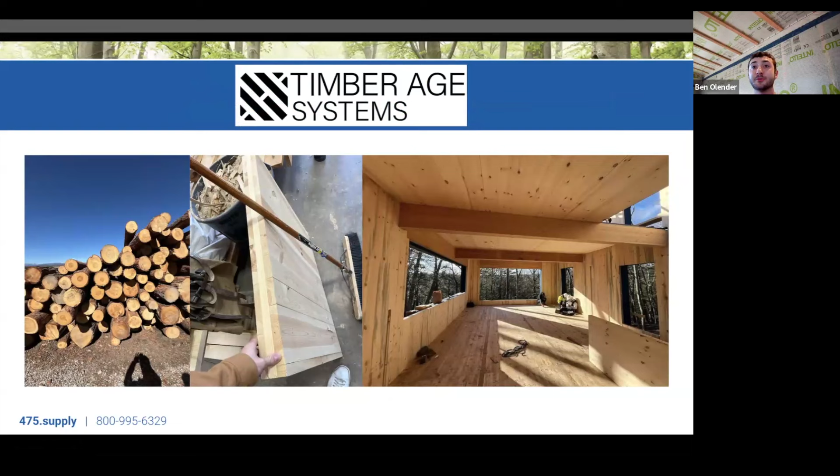Hi everyone, I'm Ben Olender. I cover the Midwest and Rockies, as Johnny said, 17 states, so a pretty wide range in projects across my region. The ones I'm going to highlight today will be Timber Age Systems, a CLT company based out of Durango, Colorado. They have these great products, building out a system based on an interior core of ponderosa pine, using reclaimed wood from the Forest Service and turning it into beautiful homes. But the process in which they do so is very interesting.

They utilize our Proclima system with the Adhero 3000 as their primary air barrier on the back side of their CLT, as you see in the exploded image in the middle. From there, they build out their stud cavity with framing and dense pack the wall, finishing off with our Solitex Mento Plus, a membrane that can be dense packed directly through. This was a very unique project to be on site, given that all the materials are sourced locally from Colorado, and they are building local as well, this being in Boulder. The image on the right is real unique.

It's showing some of the complicated air sealing details they would have to go through to seal their wall sections to their floor, and then turning that to the outside of the structure.

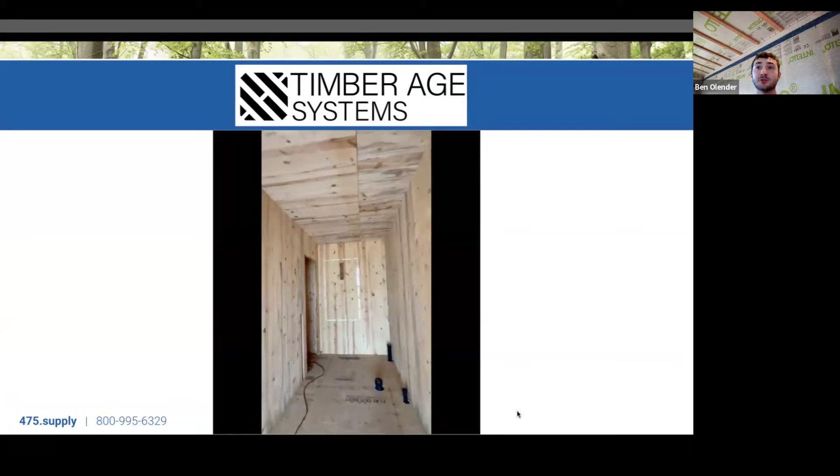Here's a great walkthrough showcasing the interior finish, which is the CLT panels themselves. They're very beautiful, you get the wood grain exposed, and they have a unique detail which I love: for the window and door openings, they actually pre-notch them out. So on install, they just saw those out, and the homeowner can use them as tables, doors, and different things in the home.

Here's some additional shots of the structure. They have recently completed the second level and are wrapping that. I hope to be going back soon in the coming weeks to see windows and doors and the project finish off.

The next project I wanted to talk about was a collaboration between Ecococon and Old Town Design Build, located in Fort Collins, Colorado. This project was atop a mountain in Loveland, so definitely a more unique job site, given that they had to clear off a mountaintop to build the project. They had unique challenges given the constraints of space with craning in materials.

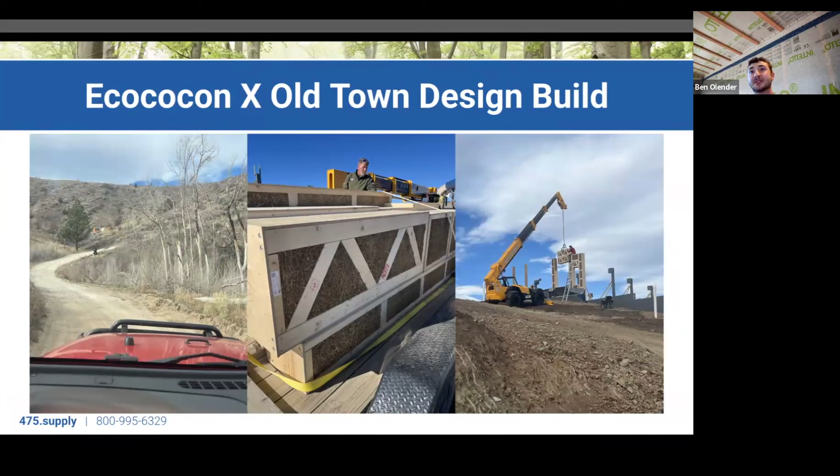But here in the center, you're seeing their unique straw bale panels. These panels are paired with our Solitex Mento 1000 system. They wrap each panel individually, tape the seams of those panels, and as you see on the image on the right, you can see their wall sections coming together - that's actually made up of many different Lego blocks, like I like to call them.

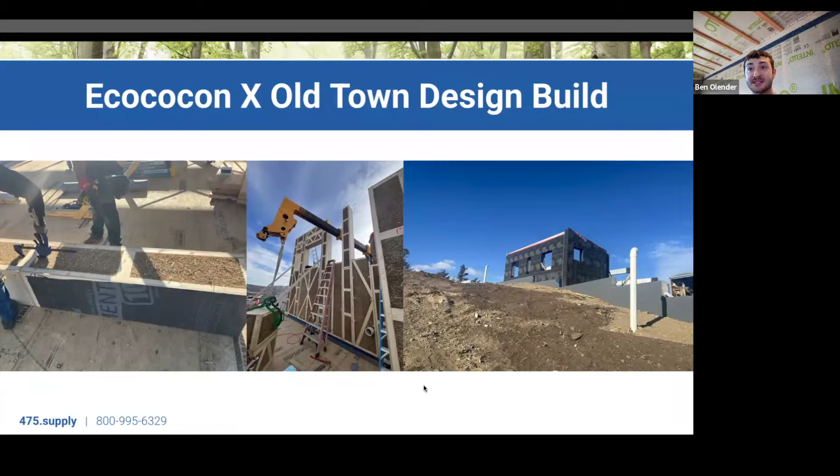This was a cool project that had very unique challenges given that it was on top of a mountain. The wind was very aggressive, and they actually didn't have many issues. On the interior, they used Intello Plus, our interior air barrier and smart vapor retarder. And then for the walls, they also used our DB Plus, our more sustainable grade smart vapor retarder as well. So this was a cool project that really showcased that even in adverse conditions atop a mountain, you still can achieve passive house levels of efficiency.

I hope to go back out to this one soon as well to see how they've really buttoned up the exterior and siding and finished up.

The last project I wanted to touch on, which is my favorite, is a sheathingless enclosure with geometry and materials. This is what I like to call more of an experimental build. I don't see many projects doing these types of assemblies, and it's really unique when an architect or builder wants to attempt something out of the box.

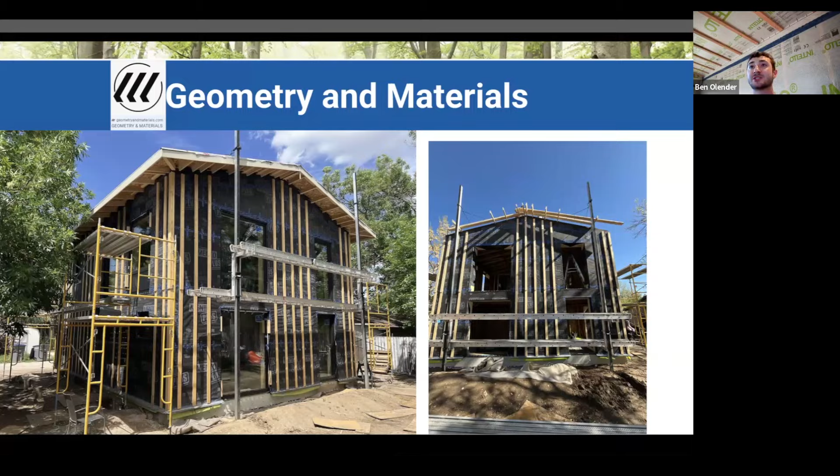Then showcasing at the last, the rooftop detail, which is showing an after-applied rafter tail so he can maintain his drainage and vented cavity.

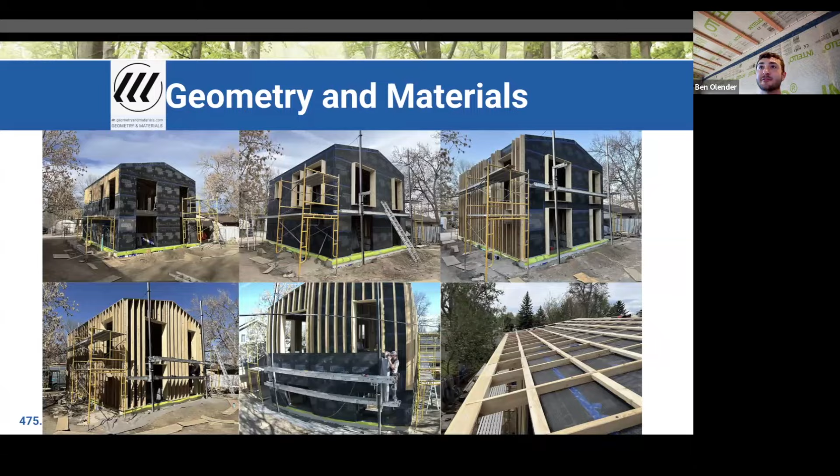The last detail of this project, which I really want to highlight - and we do have a 475 building blocks segment on it - is a slabless slab. I've never seen one of these in person, and it was very interesting to see this be put together. The assembly was compact gravel and then two layers of thick foam. He then wrapped our Stego subslab vapor barrier atop of it to air seal the system and then put a subfloor down.

So overall, all of these projects were really unique and experimented with trying different things that we like to see in the construction space. And I'm always happy to support and hope to see more of these in the coming year.

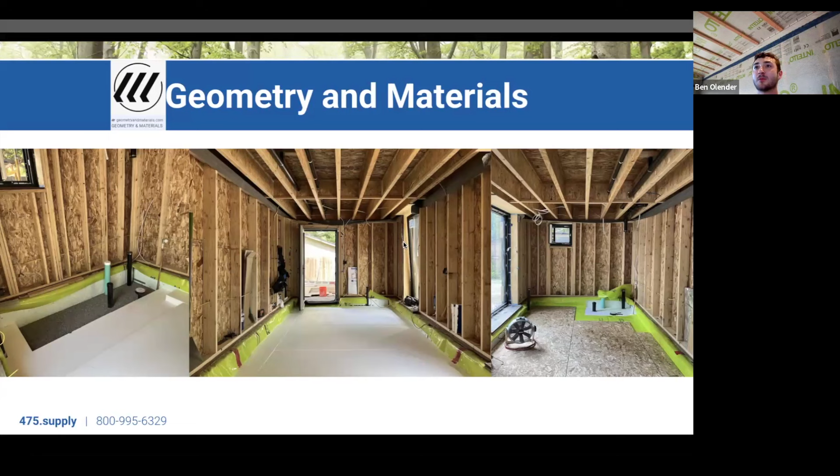Thanks for the intro, Johnny. Yeah, one last thing to note is I've been with 475 since 2018, and it has been a very fun ride, and I'm excited to see everybody else's presentations today too.

So I'm going to be showing you two projects. One of them, a custom home in Oregon with a timber frame, mass timber and Gutex wood fiber, and another project in Truckee, California that was designed to the Passive House standard with some tricky air sealing transitions. That one designed by Studio Loadline and Sally Gimbert.

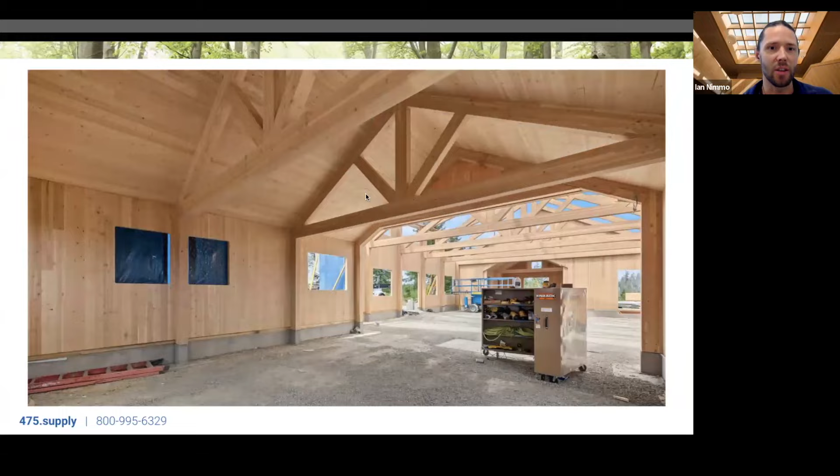So this is the first project in Oregon. The timber frame's going up here, so obviously it's going to be a very beautiful interior. We have the mass timber CLT panels going up on the outside. These are manufactured by SmartLam in Montana. And a nice picture here seeing how the project's coming together and what it's going to look like on the inside. So a really nice home to reside in.

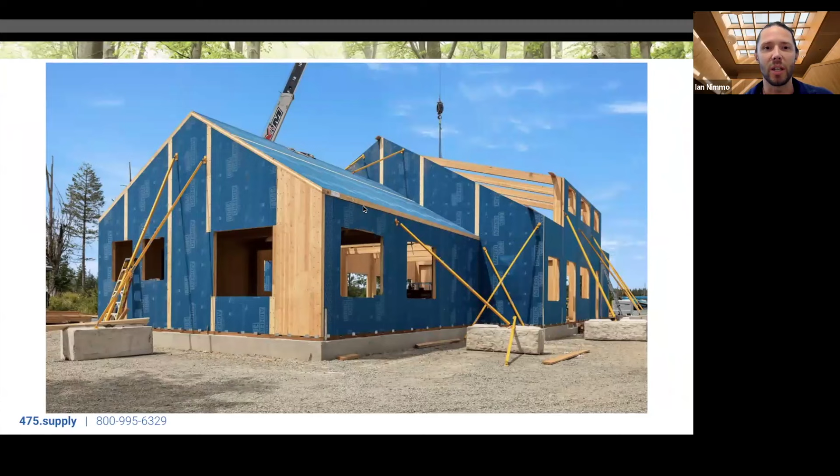The panels were protected by our Adhero 3000 membrane. This membrane was installed in the shop in Montana by SmartLam, and then we used Tescon Vanatape and Visconn to seal up the exterior for a complete air and water control layer.

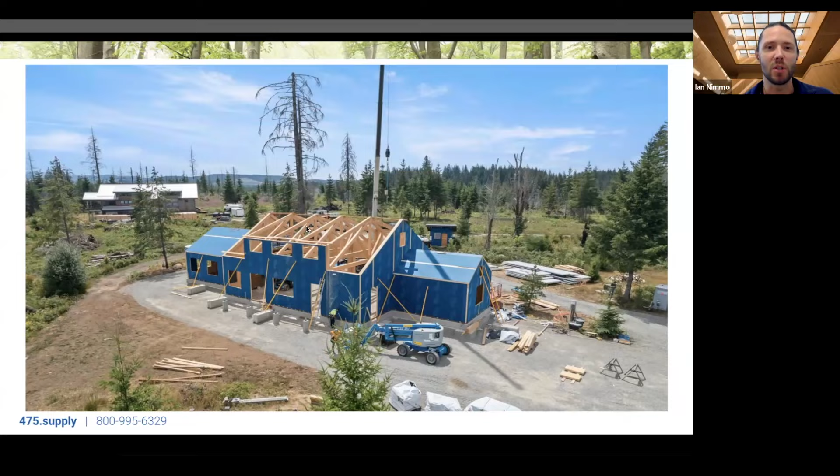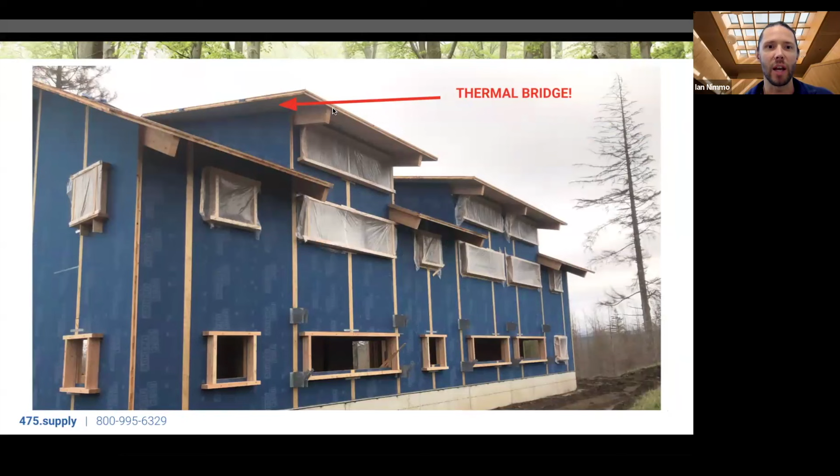One unique thing about this project is it's a second project to this project you can see in the back to the left. Both of these projects were mass timber and both were insulated with Gutex wood fiber. But there's a big difference in how the Gutex wood fiber transitioned from the walls to the roof in either project. So this is the original shop project. Gutex wood fiber was added to the walls and the roof here, and what you can see is there's an actual thermal bridge created by the CLT panel that overhangs to create the eaves.

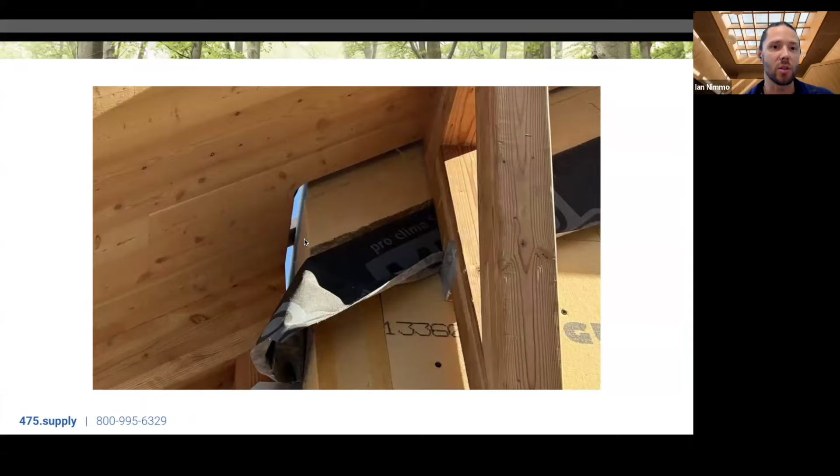So on the second custom home project, the homeowner actually disconnected the eaves from the roof structure, so you can see there's a pretty big gap there. And again, now we have the ability to have a continuous layer of Gutex from the walls to the roof. You can see in this image that the Gutex is filling up that space above the roof to the eaves, and then you can see the complete transition of the Gutex wood fiber from walls to roof. They're actually completing the rain screen from walls to roof as well, which is pretty cool.

Last picture here of this project, you can see the plywood sheathing going on those battens that are creating that rain screen above the Gutex, with the underlayment above and eventually metal roof. So a high performance, vented, mass timber, timber frame, Gutex wood fiber project.

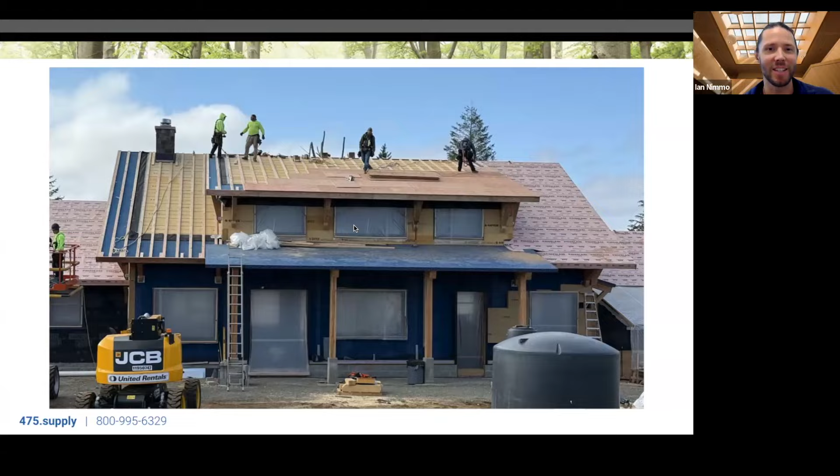Pretty unique, I thought. Second project here was in Truckee, California. Truckee is a very unique place, at 6,000 feet, gets a lot of snow, very cold in the winter, but nice and toasty in the summer. The project was designed to the Passive House standard. I don't believe they're certifying, but here's a nice picture of the project.

They have some really deep overhangs over those south-facing windows. I took this photo in June this year, so you can see that even in the middle of summer, a lot of those windows are being completely shaded from the solar radiation. The project was wrapped on the walls with 3 inches of mineral wool in addition to the Adhero 3000.

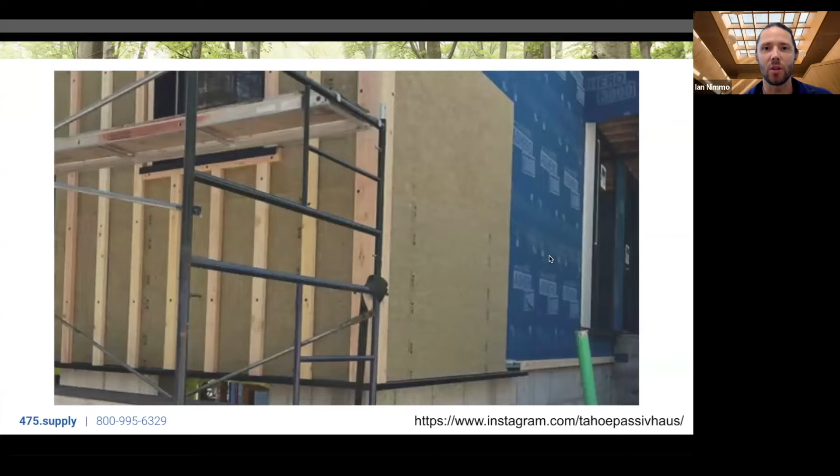Which acted as that water and air control layer. So this is what you need to hit the Passive House standard, PHI, in this climate - just about 3 inches of exterior insulation with a 2x6 framed wall.

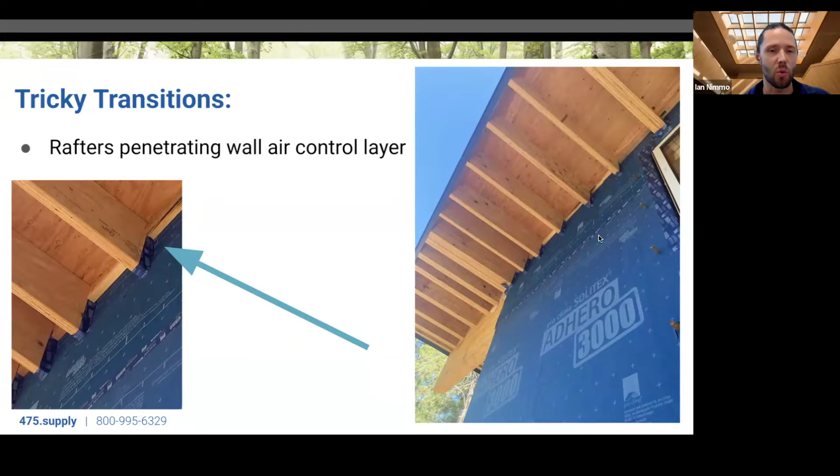So getting into the tricky transitions here with air sealing - that last project we saw in Oregon had a nice transition from wall to roof of that water and air control layer. This project had rafters that extended through the walls, so they were sealed up with that Tescon Vanatape around each rafter.

We also had a condition where we had living space above a garage. So I'm standing in an unconditioned garage here, and you can see where that arrow is pointing above those floor joists is conditioned space. So they're planning to wrap Mento 1000 on the underside of those floor joists to encapsulate the living space.

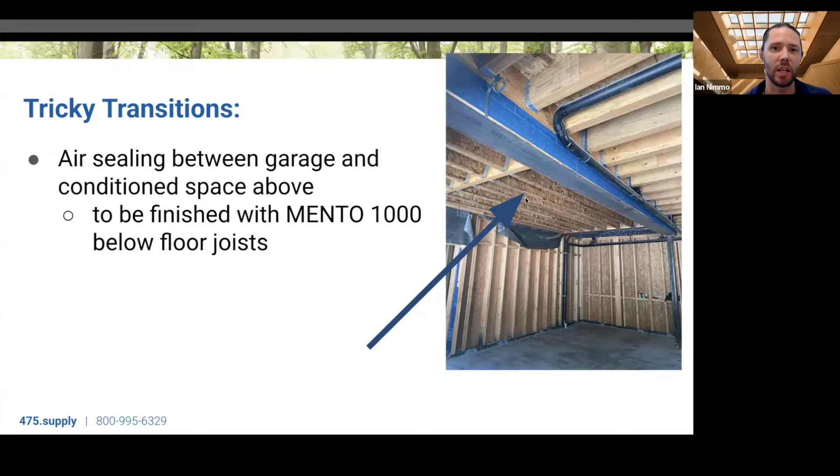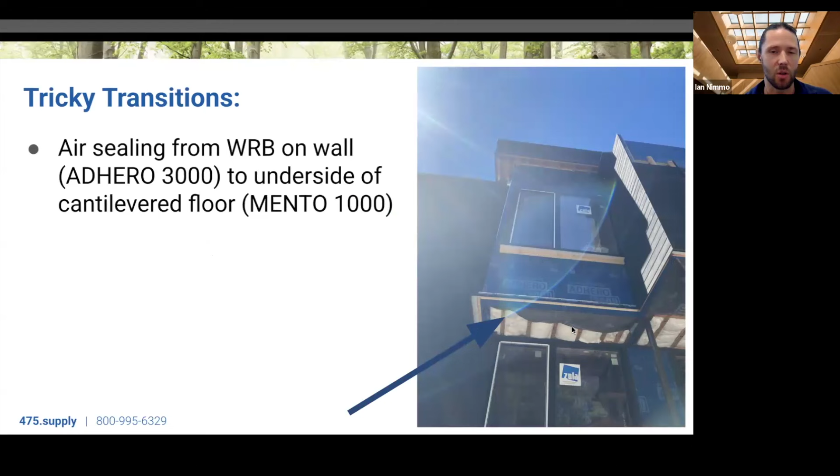Another nice tricky transition here was at this cantilevered floor. You can see the Adhero 3000 on the walls transitioning to the underside of that cantilevered floor with the Mento 1000, which will eventually be connected to that Adhero 3000 on the wall below. So a really fun project, beautiful project, with some tricky air sealing transitions.

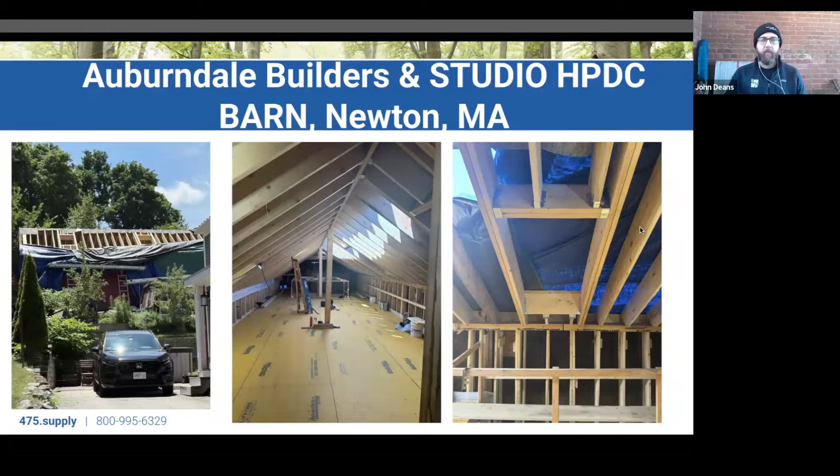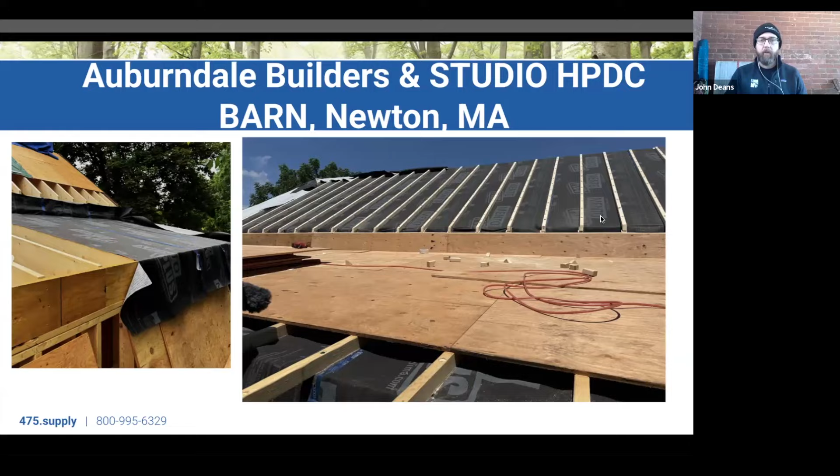In particular, the roof was a really interesting system. They reframed the roof with 2 bys and then did this vented Mento Plus roof system. They had to vent the shed roof up this little tiny wall and then up onto the major roof. If you go through our building blocks presentations, I actually get into this one in more detail in our roof assembly one.

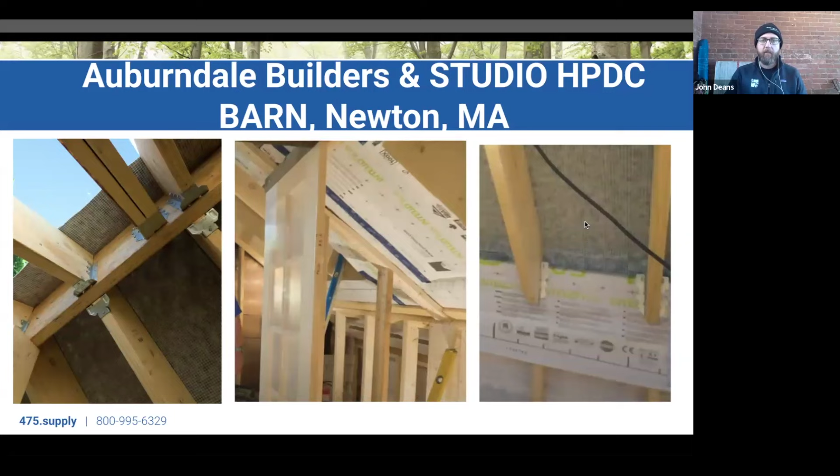They're actually soon going to be putting a Brink ventilation system in, two different Brink units to help the space. It was sort of an interesting challenge because they have to ventilate this space that could have 30 people, and then when the staff are just in there, there's only a couple of folks. So it's been a cool challenge to work with them on that.

Moving along, this project is the first Smartrock project I've gotten to be involved in. Just cool to see it actually on the wall. This is in South Boston, a project by Hediger Homes, and I was actually just there yesterday as well. They did a fantastic job.

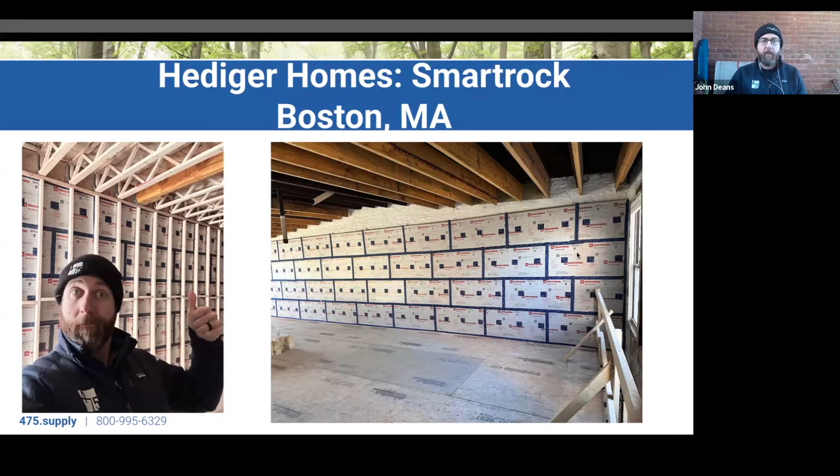What's kind of neat is that the white that you see on the brick that they haven't covered yet is actually the white Visconn—that's where the system starts, with the liquid applied Visconn membrane. Then we have the Smartrock, and the seams are taped, and the patches in the middle are over the fasteners that are holding it on the wall. They've just done a phenomenal job with it.

They had to reframe each one of the floors as well in this process, and so they're actually integrating that ledger system you can see as part of the air barrier. They're taping to it from below and then taping to the subfloor above it, and that's all connected for a continuous air control layer throughout the building.

One of the interesting spots in this is they do have this curved bump out, and they were able to get the Smartrock to actually conform to that curve, doing these nice, beautiful curved plates. So that's going to be a really nice space when they're done with it.

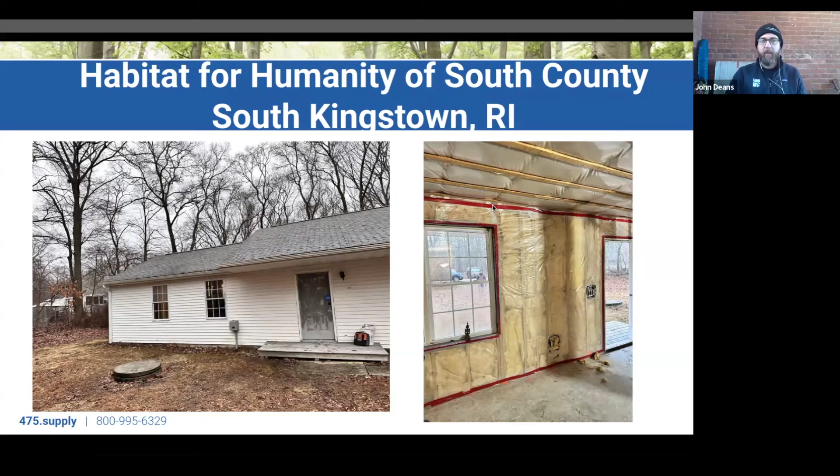The last project I wanted to go through is a community project down in South Kingstown by Habitat for Humanity. It was a 1998 habitat build that they were doing a major renovation on for a new homeowner. This is what it looked like when it started—you can see there was this really strong attempt at air sealing, with poly everywhere and red tape. So they gave it their best effort 27 years ago or whatever, but it was time to do something a little bit new.

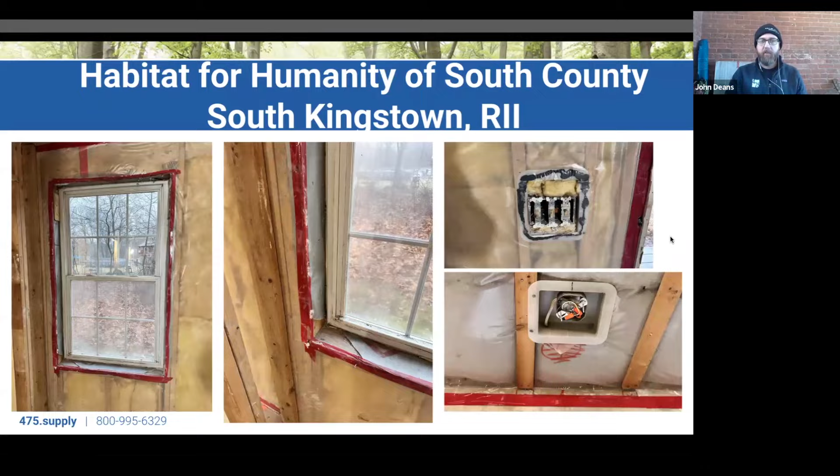Looking in a little bit closer, one of the cool things I saw was Lessco boxes, one of the products we sell now, but was used even 27 years ago to help air seal outlets. This is the kitchen window, probably one of the worst spots—you can see I'm holding what used to be framing in my hand that is now dust.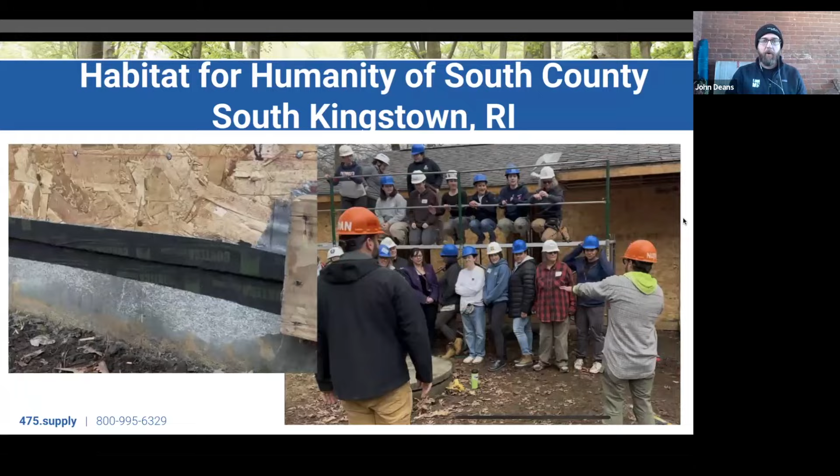Working with volunteers was a lot of fun. It was just really cool to get out and be a part of it all. This was a women's build day that I got to go be a part of, that was really awesome. Just really cool to see folks really engaging with these products and these processes.

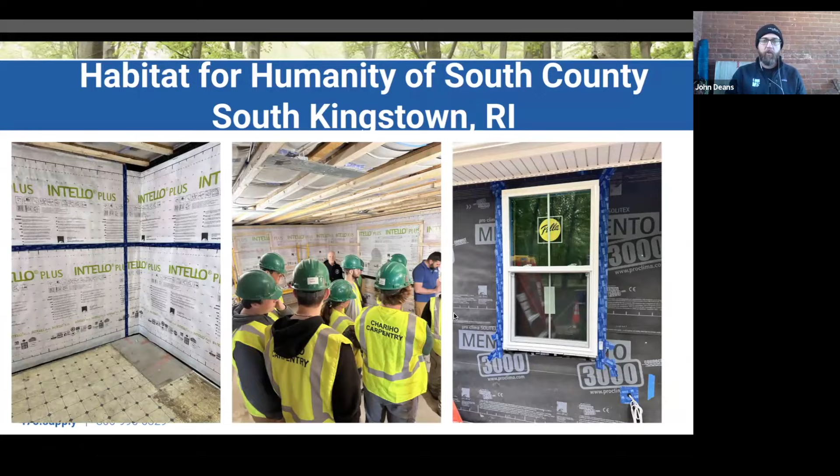So fast forward, we now have Intello Plus on the wall. That's going to be the primary air barrier and smart vapor control for the system going forward. This is a local technical high school, Chariho Career Tech, and they came out and we did blower door testing, and they got to learn about that, just a really great way to involve the community. I was really happy to be a part of that project, and it's always great to see people learning these new systems. So I think that's it for me.

Fantastic, thank you so much. Yeah, that's a very inspiring one.

And up next, we have Nick Shaw, who's covering the Southeast, who's been with us for quite a while. Nick, do you remember when you started? Yeah, pretty early on, 2017, something around there. Right, yeah.

I cover the Southeast, kind of Mid-Atlantic area. I've been really happy with how much is happening around the Washington D.C., Virginia, Baltimore area, and Maryland. A lot of great projects in Texas. A lot happening around Atlanta, a lot happening around Nashville. But I live in Western North Carolina in Asheville, and I'm excited to be featuring a project in Brevard, not very far away from me.

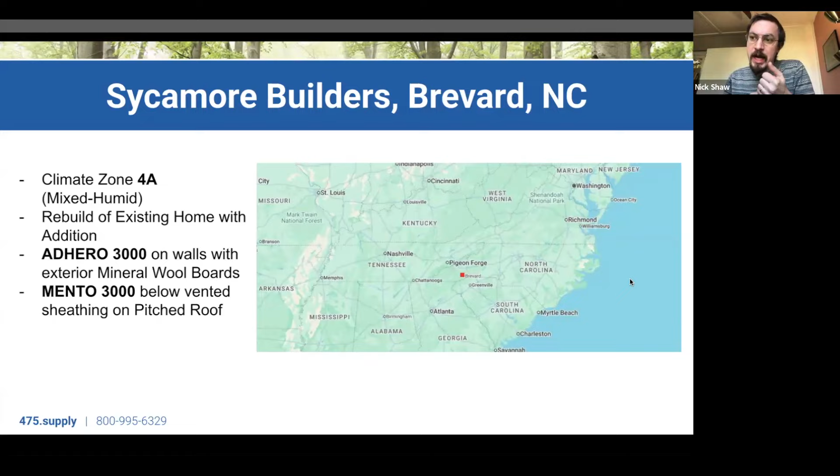You can see it's the red dot here. It's in climate zone 4A, about as far south as you can get while still being in climate zone 4. It's very close to the Tennessee border, very close to the South Carolina border. This project is a rebuild of an existing home with an addition. They went with Adhero 3000 on the walls and then Mento 3000 for their pitched roofs.

Here we can see that existing framing. On the image on the right, you can see they painstakingly shaved and removed the old spray foam that was used on that old building. It can be really difficult to remove. So there is still some residue of it there, but they're trying to rehab this project to be good for the next 100 years. So we need to be removing these old materials that were trapping moisture and could have been creating some wood rot concerns.

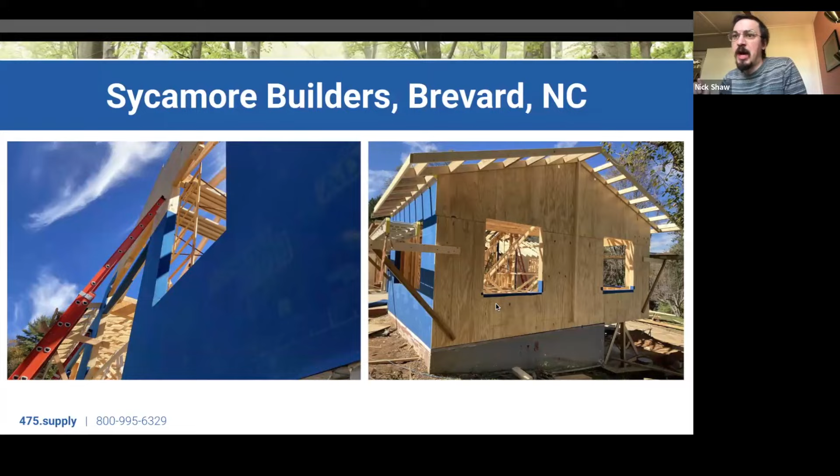On the image on the left, we can see this new framed structure meeting that old existing frame, covered with the Adhero 3000 membrane. This is a fully adhered membrane, a peel and stick. You can use it on walls or pitched roofs. You just overlap the seams, no additional tape needed. On the right, you can see them framing out that roof with their lookouts and their site-built setup for their scaffolding on the ladders there.

This project is utilizing exterior mineral wool insulation. So they did a little buck-out for their windows. They have a flanged unit and wanted to keep that in line with that exterior insulation. Here on the left, you can see that sill that's been prepped with the Extoseal Encors. This is our vapor-closed, more butyl stretchy tape. We do that for our sills because it's a horizontal surface that could have standing water. You can see they placed some shims to be able to work in a pitch on that sill while still setting that window unit level and flat.

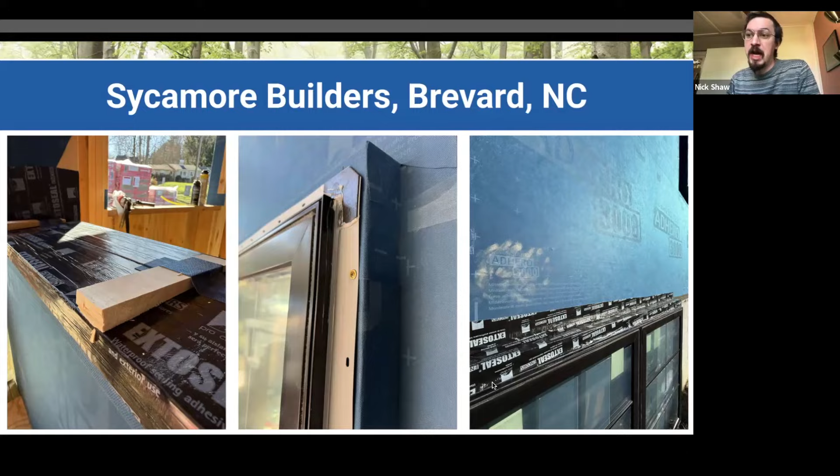You can see the flange being attached to that buck in the middle image. And actually, the header of that buck is another horizontal surface. So they topped that top edge of the header with the Extoseal Encors again, so that if there is standing water, it won't diffuse in over time. Another option would be just to be working in a bit of a pitch on that top header.

For the roof, they have a ventilated gap between the roof sheathing and the Mento. So this Mento is airtight, watertight, and vapor open, so vapor permeable. It's allowing the assembly to dry outwards through diffusion. So any moisture that is built up can dry out. It will then hit this drainage plane and shed away from the building.

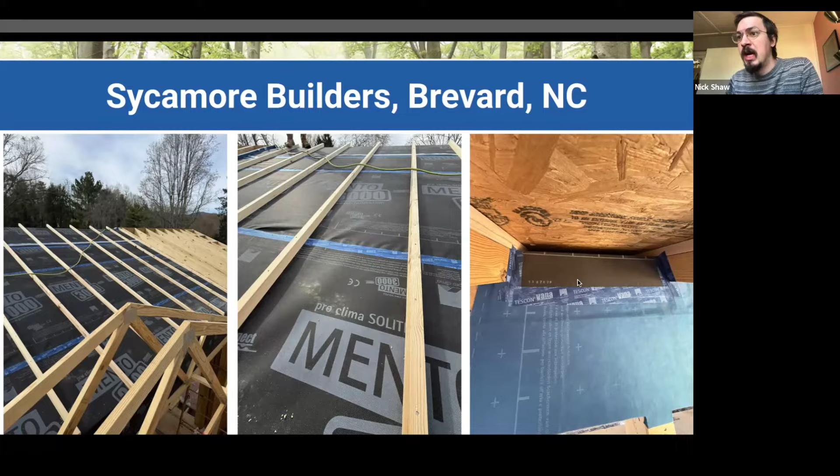Very similar roof approach to what John was showing earlier. I think it's a really great approach to getting this type of below-sheathing vented roof with just one layer of sheathing. On the right here, we're showing that eave detail where they are taping around some of those rafter tails that were continuous, and you can see the Mento overlapping and taping to that Adhero on the walls.

They are including the Intello Plus on the interior as the interior air barrier and vapor variable membrane. You can see the backside of the Mento in that image on the left, that kind of black material, and then in the center, just showing an outdoor outlet.

Fairly simple install there, but it's a nice clean detail to pinch tape around those wires that penetrate the Adhero. A gasket is helpful - with a gasket you're allowed to adjust those wires, but with a pinch tape you can still get a good air seal.

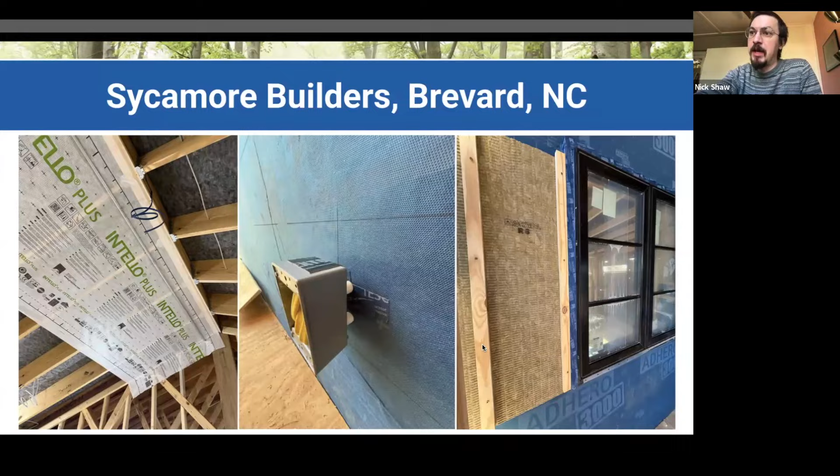They're holding that outlet off so it's in line with their exterior insulation, so it's not a deep alcove there. On the right, you can see that exterior insulation butting up to that window buck, and then that furring strip being applied to create that drainage plane, that rain screen vented cavity. So everything is lining up nicely.

Here's the project in process still. It is still currently under renovation, but a nice clean Adhero install. That roof sheathing's all on and all waterproofed in, so now they're dried in for the winter and can transition to doing interior work.

You can see a theme - it was a major year for Adhero. This is also the year that we came out with Adhero 1000. So we have two different varieties of Adhero: 1000 for the walls, 3000 for the roof, or 3000 for the walls if you want to go extra robust.

Next up, we have Eddie, who is by geography the smallest but mightiest, probably, section of the country that we have here, our home base, New York City metro area. So Eddie, you can take it away.

Thanks, Johnny. So like Johnny said, my name's Eddie. I've been with 475 for about 2 years now, and I cover the New York City metro area and downstate New York. No one ever knows where downstate and upstate end, but for us, that's just Westchester County. So I'll feature a project in Westchester and two projects in New York City.

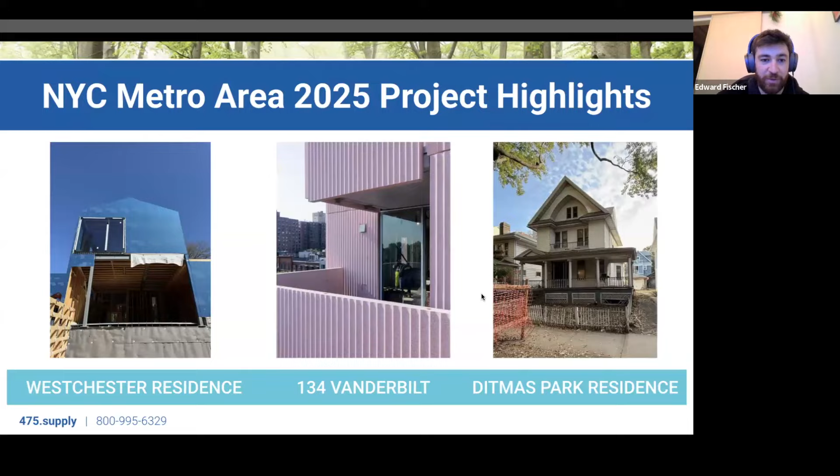All right, so these are the three projects I'm going to be talking about. First is in Westchester, a kind of rural suburban residence, and the other two are in more dense urban environments here in the city. So the first one is pretty similar to the project that Nick featured.

It features Adhero on the exterior and Intello on the interior. The architect was Brian Hopkins of Hopkins Architect, and the builder was Anthony Marchioni of CRC. They are actually business partners, so they work together on all their projects, and communication between builder and architect here is seamless, which is great when you are building a passive house, where construction sequencing and detailing is really important. So they really nailed it on this job.

As you can see, there are a lot of floppy bits - that's what we call these pieces of Intello hanging out. Sometimes they're not using Intello for a floppy bit, but they did a really good job thinking about the sequencing to make sure that the interior air barrier transitioned smoothly to the exterior, so that places like this cantilevered overhang were still totally airtight on both sides.

This project also has exterior insulation. I don't know the exact thickness, but they are utilizing mineral wool with a double strapping system on the exterior so that they can mount their vertically oriented siding and still maintain both liquid water drainage and a vertical channel for humidity to vent to the top of the wall.

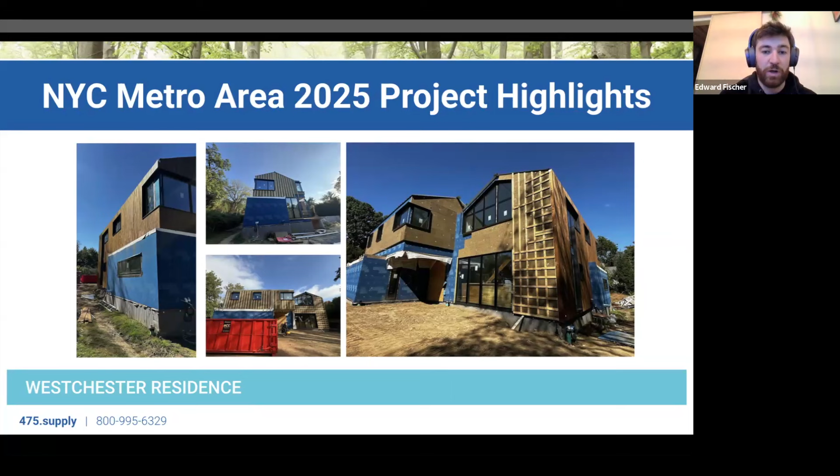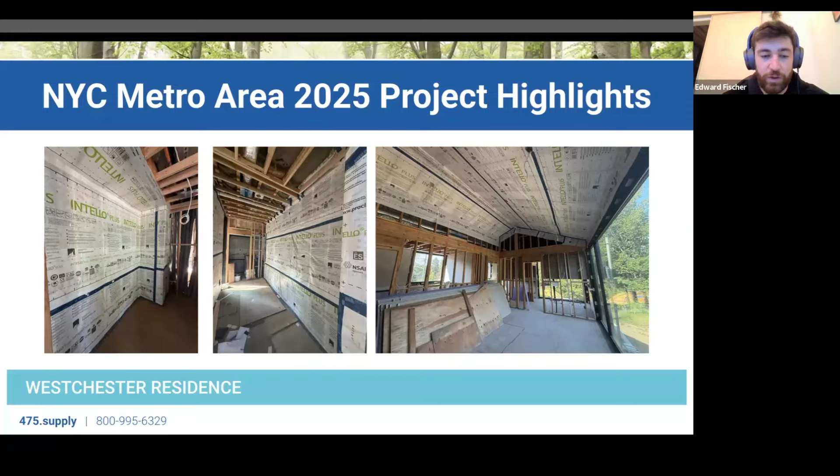Next project I'm going to talk about, a very different project, is 134 Vanderbilt in Brooklyn, New York. This was not a passive house, but it was airtight, featured high performance windows and doors, and notably featured the Lunos system as the ventilation system.

This was built by KSK. New Way was the installer of the Lunos system. The architect and developer have worked together on many projects - they are SO-IL and Tankhouse. They have a lot of projects in the multifamily high performance world in New York City.

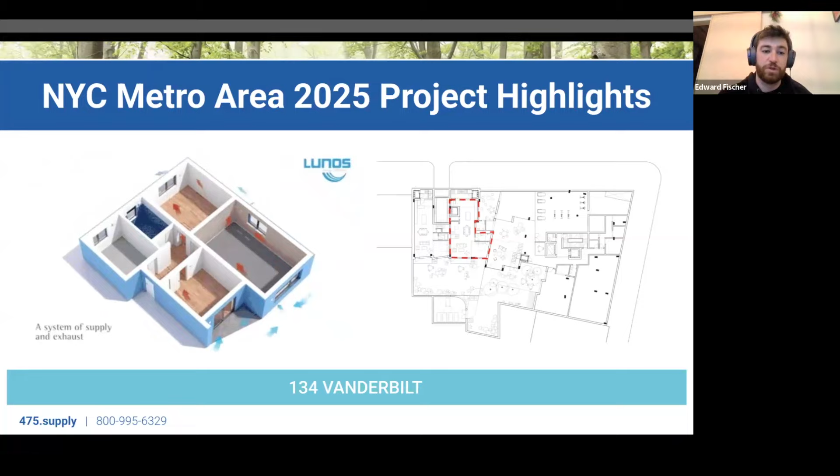So as one fan is exhausting air, the conditioned air on the interior heats up and charges the core. Then when it switches to supply, that heat can be reabsorbed by the incoming air. It can provide totally balanced, continuous ventilation to small spaces, so it's really suitable for retrofits, tiny homes, but also multifamily projects as well.

The last project I'm going to highlight is super interesting. The architect is Jenny Payson Architect, and the builder was Axia. This is in a more residential neighborhood, also in Brooklyn, where a lot of the homes are freestanding, which is not common in all of the neighborhoods in Brooklyn.

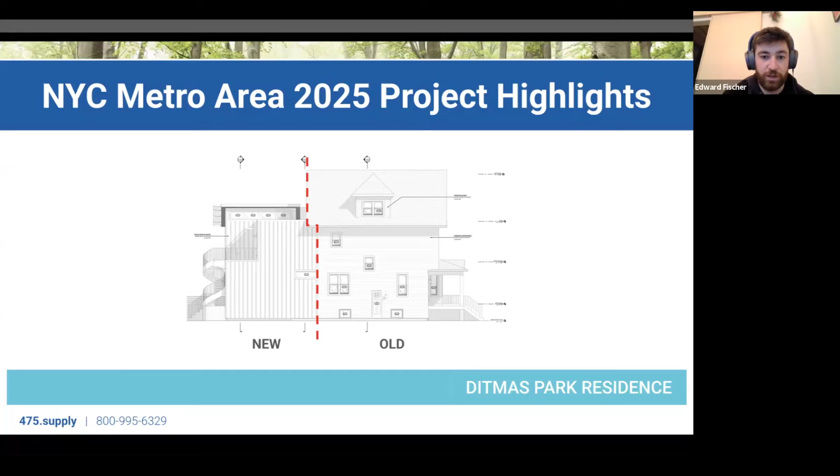This was a historic home in a historic neighborhood with a contemporary addition. The front-facing part of the home, facing the street, is the historic portion, and they added a contemporary addition in the rear. While this isn't going to be a certified passive house, they did take a lot of care to integrate the air sealing details between new and old to make sure they could get as good of a blower door test result as possible, which will be done fairly soon. So good luck to the team on this project on your blower door test.

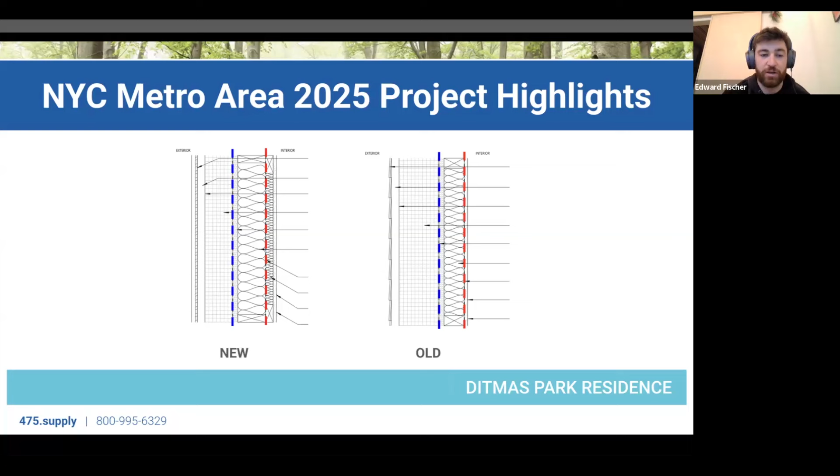As you can see, the wall assembly in the new construction and the old construction portion of the home are slightly different. Both feature an interior and exterior air barrier and exterior insulation. The old portion had historic interiors that needed to be preserved, so there is no service cavity there. In the new construction wall assembly there is a service cavity, allowing electrical to be run to the interior of the interior air barrier without any penetrations. There are also slightly different amounts of exterior insulation in these two wall assemblies, because you get a little bit of extra R-value from the insulation in the service cavity.

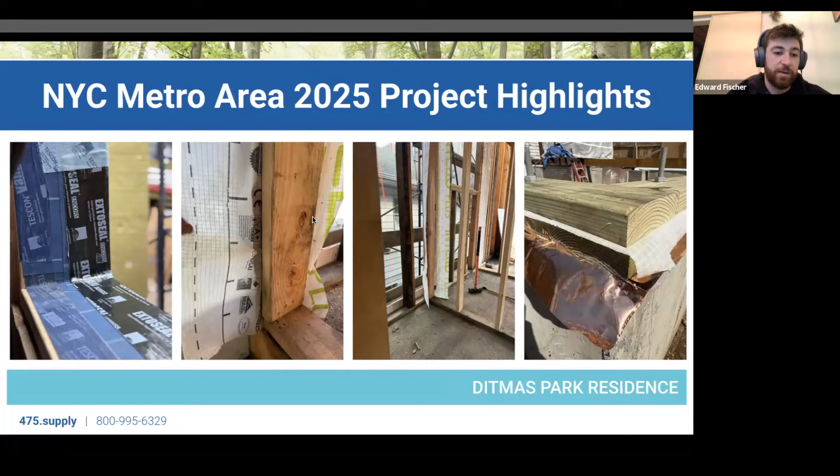Just to zoom in on one of those details, the rear featured really clever, thoughtful sequencing. The interior walls had Intello installed before the exterior walls went up, so you can have totally continuous air tightness between rooms without having to wrap around that interior wall last stud. There was really great installation of the window details as well, as you can see.

And then finally on the front, you can see that the historic nature of the facade was deconstructed in order to make sure that the Adhero installation was totally continuous, but the historic nature of the facade was preserved behind the rain screen assembly. So hats off to the project teams for all of these projects.

And yeah, to the Ditmas Park team, good luck on your blower door test. Can't wait to see the results.

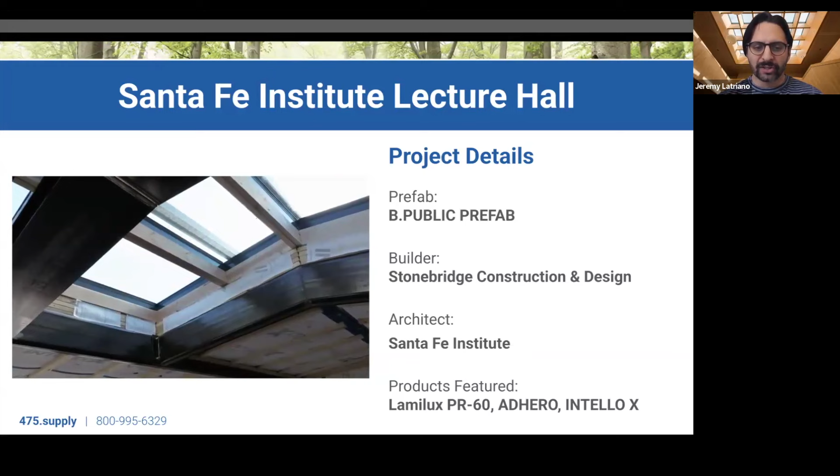A really cool detail on this PR60 that I want to highlight is this steel beam that ran continuously along the length of the skylight. The architect really wanted to have the steel beam penetrate the skylight. So as you can see here, the glass was divided into two segments, one on either side of that beam. That was a portion of the design that he really didn't want to compromise on, so we really wanted to make it happen for him. And the PR60 and its ability to offer design flexibility is really unmatched, so we were able to make that work.

Pain in the butt for our installer to execute, but in the end, it came together really nicely, and we're really happy with the result and happy that we were able to maintain the architect's intention in this design. This does create a bit of a thermal bridge, but as we can see, the PR60 is insulated continuously at its perimeter, so we are mitigating that thermal bridge by insulating along it, even though we couldn't break it entirely.

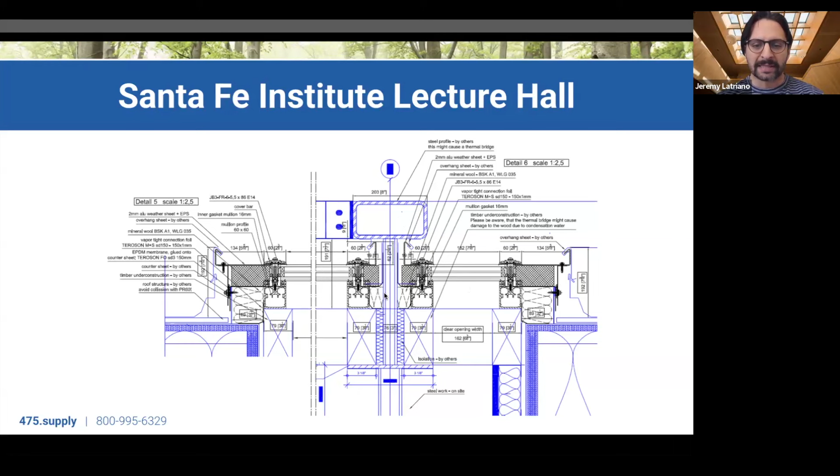The next project I want to talk about is closer to home in Brooklyn Heights, actually just a short walk from our office in Cobble Hill. This is another wonderful project, high-performance masonry retrofit from Ingui Architecture, who's one of the architects I've been working with longest and most frequently, particularly for Lamilux skylights. Dynamic reconstruction, the builder here, has also done a wonderful job in general and specifically supporting us in the execution and installation of these, again, Lamilux PR60 systems.

Also featured on this project was a smaller skylight over a staircase. This is a classic Ingui Architecture detail, allowing natural light to pour through to the gorgeous staircases they design. In this case, the skylight is quite substantial, letting in so much light that they opted to go with an exterior flex shade for this PR60.

This is actually the first project where we were able to supply and install these exterior textile shades, which allow us to mitigate solar radiation, heat gain, and illumination, reducing visual discomfort when conditions are particularly sunny.

Another interesting detail: since this PR60 had to tie into a vertical wall at its ridge, it required a structural attachment at the steel joists. So the aluminum, steel-reinforced profiles of the PR60 were tied into steel consoles, which Lamilux engineered and supplied as part of their scope.

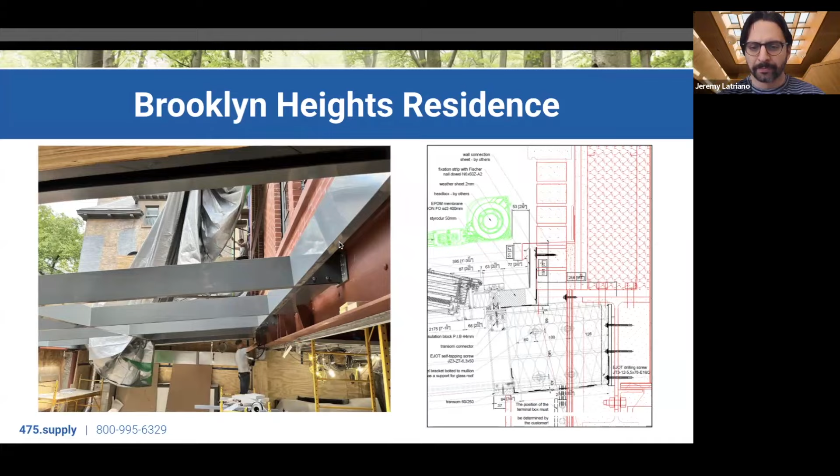In that way, we were able to provide structural connections installed as part of 475's package for this specific glass roof. Here is the section drawing of that same detail.

The final project, which I actually just touched upon this week, is the Vienna Zero Energy project designed by Peabody Fine Architects, and I'm very excited to be joined today by Azumi from Peabody. Thanks for coming, Azumi.

Azumi and I worked very closely together on this project to ensure that the skylights were specified and executed appropriately in the field. This project is exceptionally high performance, so it was critical that the skylights provided the thermal performance necessary to not compromise the enclosure, while also being carefully calibrated to provide the appropriate amount of light without over-illuminating or providing too much radiation.

Through the Fakro system, we also supply insulated flashing kits to ensure a thermally continuous connection to the surrounding roof structure. In this case, we also provided external shutter blinds, again to mitigate solar heat gain as needed and minimize penalty on cooling demands.

This project was very innovative in a number of ways and very forward-thinking. It's aiming to achieve Passive House certification as well as Energy Star certification, and overall features many of the characteristics that 475 believes are essential to a high-performance building.

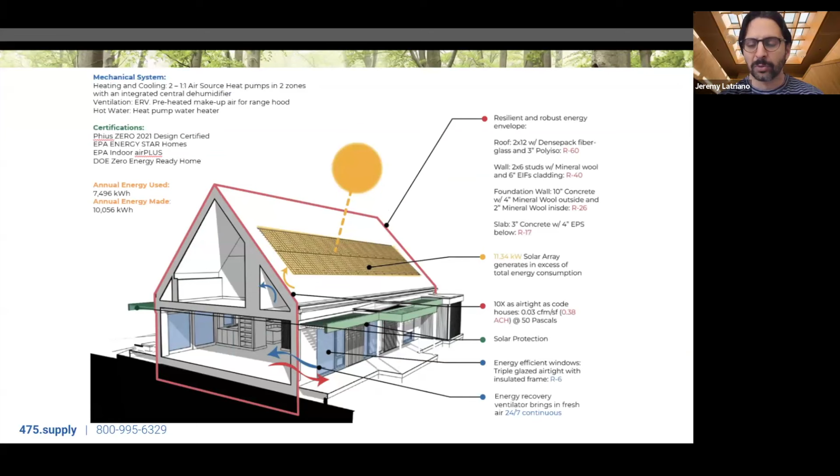Thanks, Johnny. I am the customer service rep for Brink on the West Coast, Rockies, and New England, and my coworker Chris Lee is the rep for the Northeast, Mid-Atlantic, South, and Midwest. Brink is our centralized ERV/HRV system, and we've got four projects today from the year that I want to highlight.

The first one is a project very local to us with Red Oak Construction and Andrew Magnus Architecture. Chris worked very closely on this project with Slavik to design and implement the system into this home. New York City is known for having very tight spaces and very small apartments, so this team did a great job implementing all of the mechanical systems as well as electrical and plumbing into this space.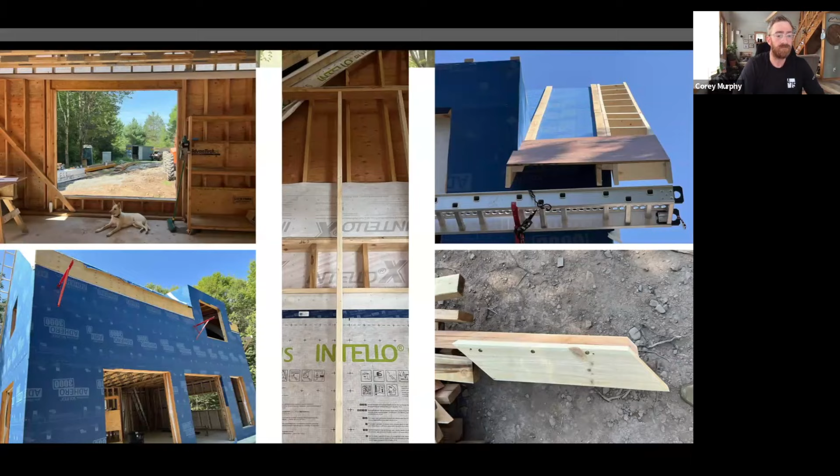Next up, we've got City Lights Church over in Manayunk, Pennsylvania. This is a really cool retrofit because it confronts reality. This neighborhood is right on the Schuylkill River, and the Schuylkill River is beautiful. However, it has had a number of 100-year floods within the past decade, and that's a problem.

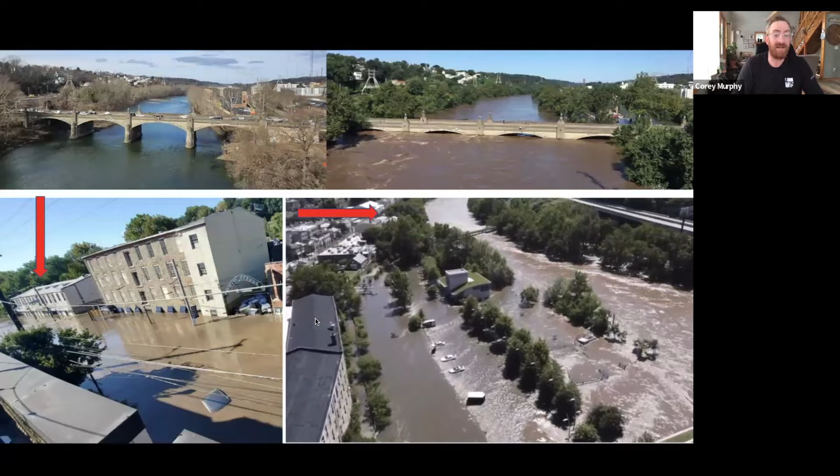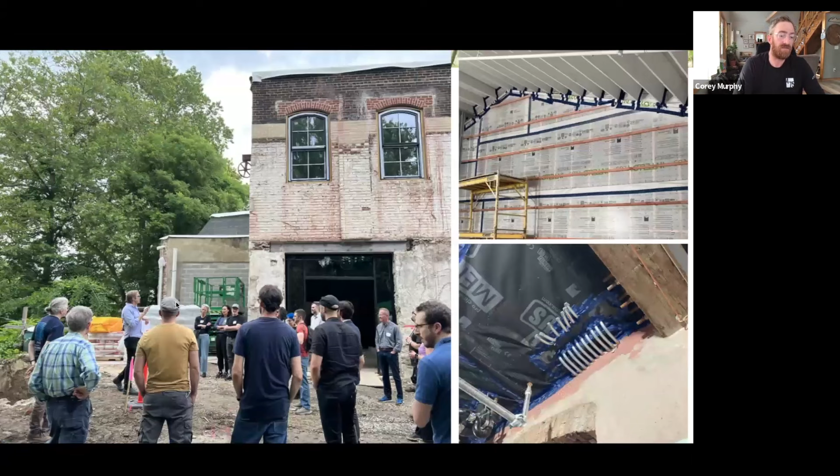As you can see, this is where the retrofit is located. It was underwater like a year ago, and it's going to happen again. It has happened before. The architect, Jeremy Avellino at Brightcommon, said, well, why would I take a whole building and retrofit it when I expect and anticipate that flood to happen again? We can take every step to make sure it's watertight, but it's still going to flood. There's still going to be entry pathways.

So in a lot of ways, this is adaptive design, where he designed out the first floor of this structure right in the floodplain and focused on air sealing it out completely from the second story passive house structure. You can see here this Mento Plus that's been air sealed around all of this conduit, affectionately called the rib cage. That is to keep all of the flood waters out of the first floor ceiling, in between the first floor and the second floor. And up here is the second floor, where the passive house enclosure is.

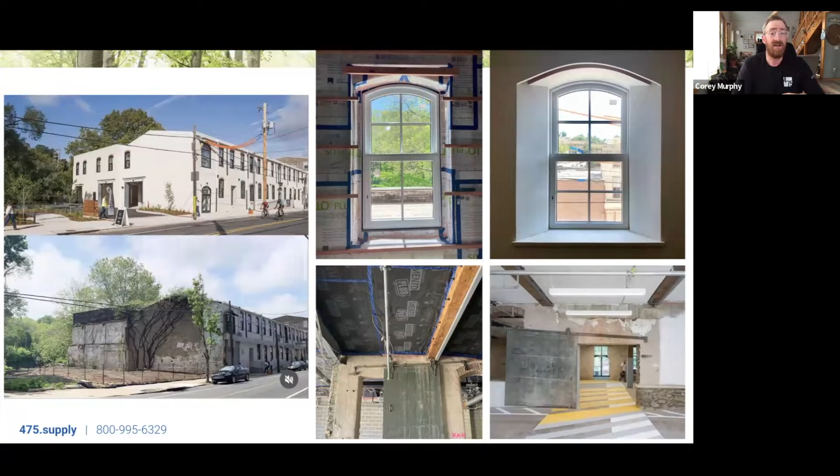Just because he's removing it from that enclosure doesn't mean it can't look cool, doesn't mean he can't add that same level of beauty and bring new life into this old structure. He's confronting the future in a different way. He has not just accepted the reality, but embraced it through the virtue of this design.

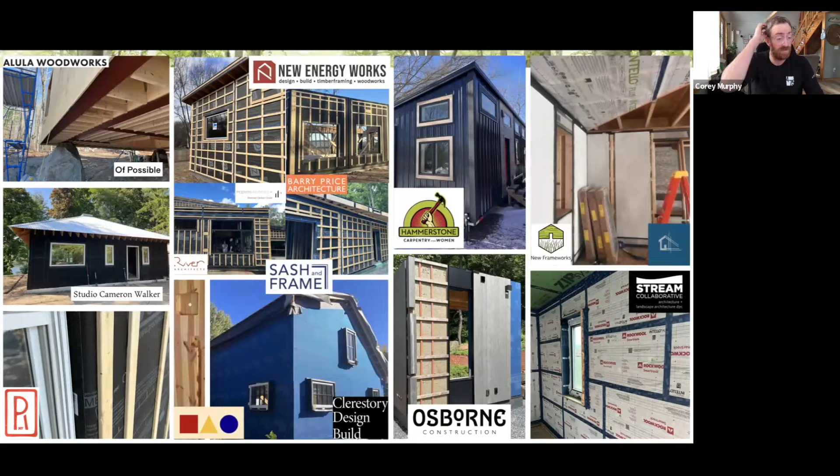The thing is, I really struggle to choose one project. I struggle to choose two projects. This has been an amazing year. I've gotten to work with some of the most creative and innovative folks around, and I think every other presenter can probably agree with that struggle. So any single project you see before you could have been used. In fact, for every one of these pictures, there's like another 50 that easily could have been focused on, some projects that are just melt-your-face beautiful, right?

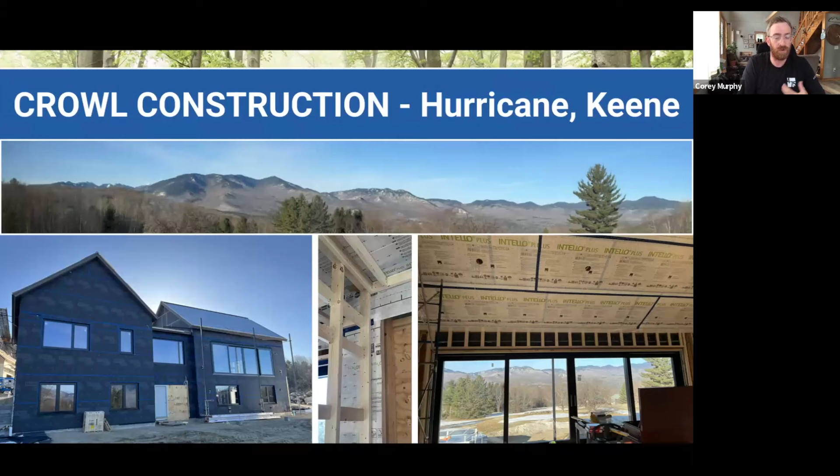Just stop you in your tracks and embrace the moment, and some that are involving really crucial, innovative sequencing. 2025 was a year of presenting, of public speaking, of getting out and interacting with folks, and trying to take as much as I could from them and use that within my position as a vector for best practices. Take case in point, my own home retrofit, where I got to use a lot of the same strategies and innovative techniques I've learned from others, and try to pass on.

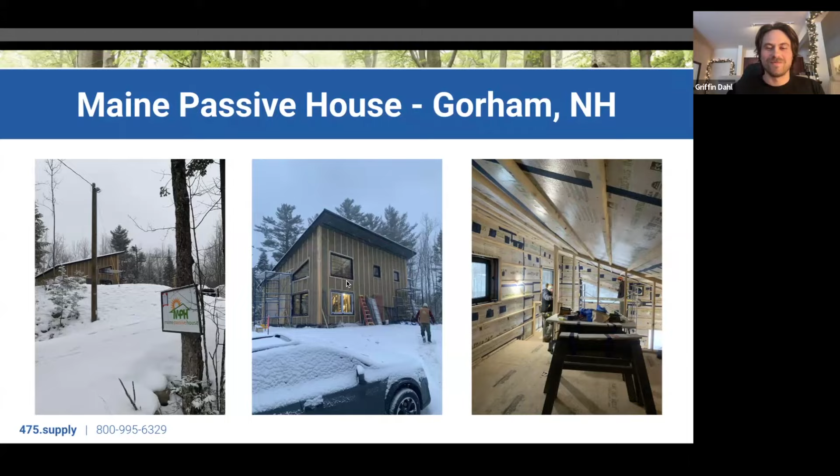It was really great to see this team in action and see how they were collaborating, and you could really feel the morale and the love in the air that they shared in order to get this project done and work through it, even on a stormy day at 4 p.m. when they're looking to head out of there, but they had smiles on their faces and were happy to be doing the work. So it speaks to their business model.

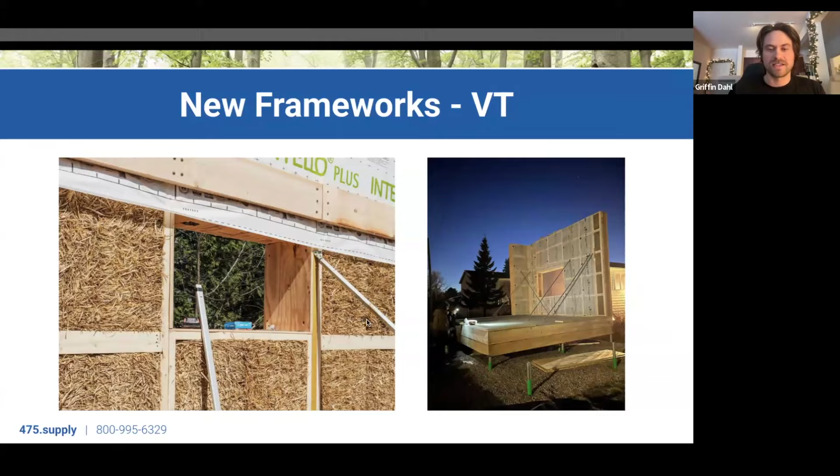Next up, we have New Frameworks out of Essex, Vermont, and they're a straw panel manufacturer. They're really focused on using natural building practices by taking straw from perennial grasses to sequester carbon in the panels that they build, and they focus as well on high performance upgrades in existing homes, as well as ADUs that they produce. Really cool, unique concept that they're working on.

The Seed Collaborative is also a really neat concept. They're creating a community around straw panel manufacturers and helping others regionally throughout North America to replicate their business model, design approach, and how they manufacture and run their business practices. New Frameworks is also a worker-owned co-op. So the way that these organizations are doing business is really a testament to the work that they're doing and how they're progressively moving into the future.

Last but not least, we have Emerald Builders out of Maine, and this detail I wanted to highlight is a concrete-free slab here, a slab-free slab, and Glavel was used as an aerated glass fill under this vapor barrier. Glavel is really cool because it's post-consumer recycled glass that's used in the fill, so it can take the place of dense poly board insulation.

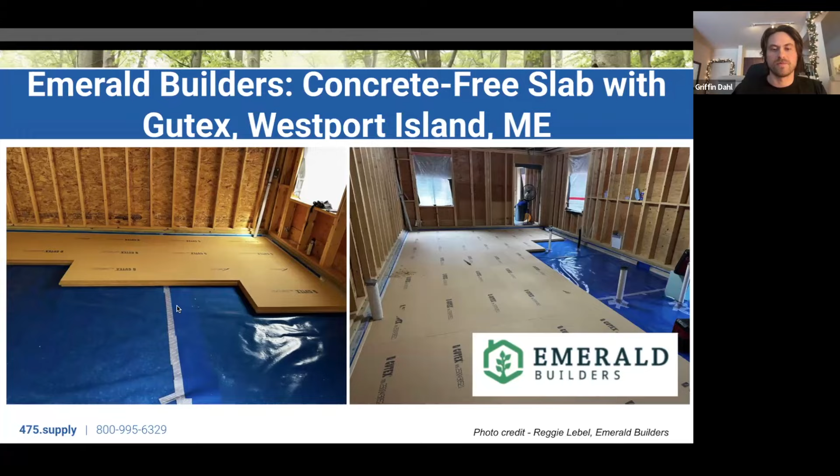As you see here, we have Contega tape sealing that vapor barrier connection, that poly vapor barrier, and Gutex wood fiber board on top of it. More clean details here: we have the Extoseal Finoc being a capillary break under that sill plate, and then we have the Tescon making that connection from the sill tape to the subfloors here for continuity.

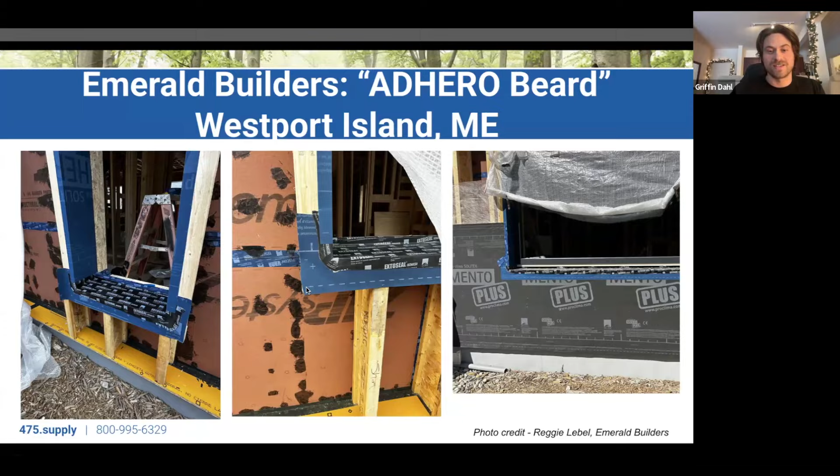Another neat detail to check out is this Adhero Beard concept, another I-joist outrigger. The sheathing layer is the primary air barrier, and the window buck is prepped with some Adhero membrane to then tie in with Mento Plus to be used for dense pack insulation, as you can see here on the right hand side. It's a testament to the way that Reggie at Emerald Builders is really attentive and precise with his detailing and installations.

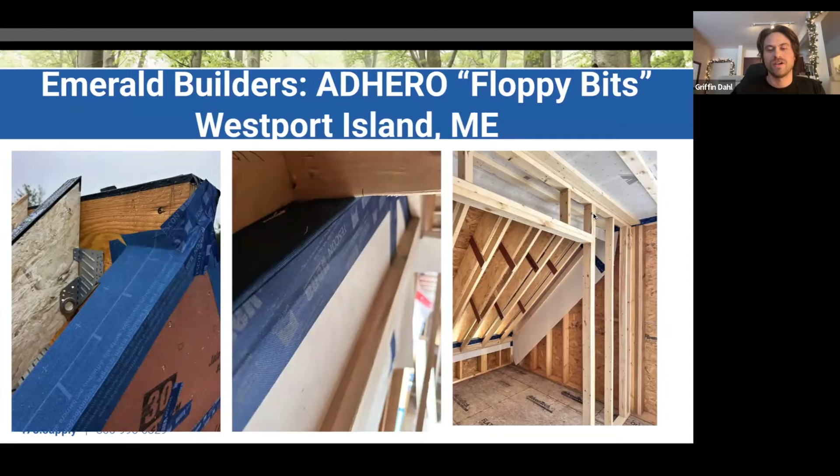Here's another photo of that connection tying in from the primary air barrier on the walls to the roof. On the right hand side, you can see that connection where he nifty used Adhero in this concept to connect to the Intello X smart vapor retarder on the ceiling. Once again, more clean design details from Reggie - you can always count on that from Emerald Builders. And here you can see Contega Solido IQ making the connection to the foundation wall there.